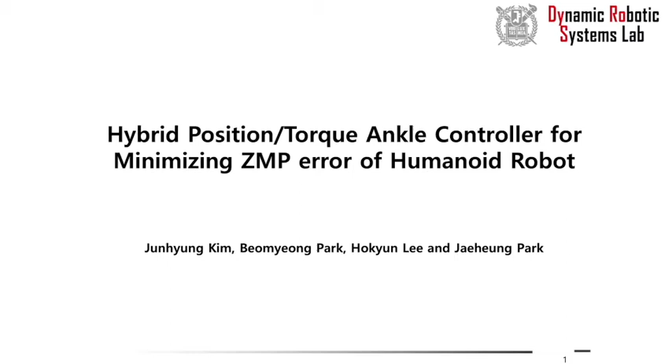I will introduce my research: hybrid position torque ankle controller for minimizing ZMP error of humanoid robot. When generating the walking pattern of the humanoid robot, the linear inverted pendulum model, called the LIPM, is widely used. The LIPM has the advantage of being able to generate an analytic walking pattern, but there is a model error with the actual robot. Due to the model error, the error between the desired ZMP and the actual ZMP occurs.

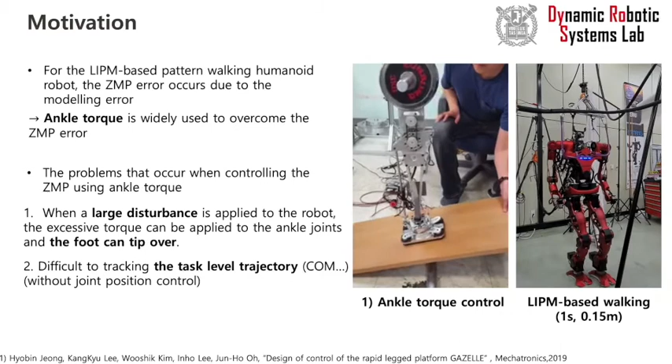To overcome the ZMP error caused by the model error, studies using ankle torque have been conducted. However, if torque control is performed without controlling the position of the ankle joint, two problems can occur. First, when a large disturbance is applied to the robot, excessive torque can be applied to the ankle joint, and the foot can tip over. Second, it is difficult to track the task level trajectory like COM.

To solve the previous two problems, the proposed hybrid ankle controller can overcome these limitations. The hybrid controller has the advantage of being able to control position and torque at the same time. The proposed hybrid ankle controller consists of a position controller and a torque controller. So when we use the hybrid ankle controller, we can control the position of the ZMP and track the COM trajectory at the same time.

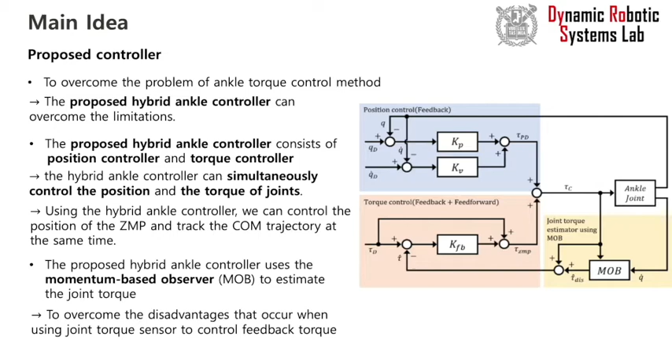Especially, the estimated torque using MOB is used for the torque feedback control loop of the proposed controller. The algorithm can be implemented without joint torque sensors and is not affected by sensor noise and bandwidth. As a related study, the first video is the previous research about ankle torque control for ZMP tracking. Although the performance of ankle torque control has been demonstrated in previous research, the limitations mentioned in the previous slide exist.

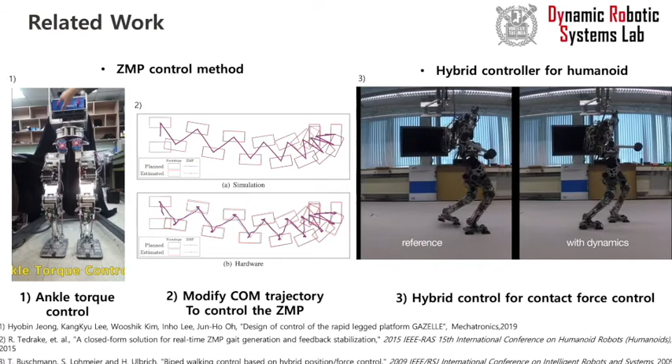Also, there are some studies to improve ZMP tracking performance by modifying the COM trajectory aside from using ankle torque control. However, the method of modifying task trajectories such as COM or capture point for ZMP tracking has slow responsiveness to sudden disturbance. Unlike this study, another example of using a hybrid controller for a humanoid is the study on the right. In that study, the hybrid controller was used to control the contact force at the task space level. From now on, we will explain the proposed hybrid ankle controller.

To track the desired joint position trajectory and desired joint torque that can minimize the ZMP error, we designed the hybrid position torque ankle controller. The joint position controlled humanoid robot has the desired joint position trajectory calculated from the IK to walk with predefined walking patterns. A PD controller is used for joint position control to track the desired joint trajectory.

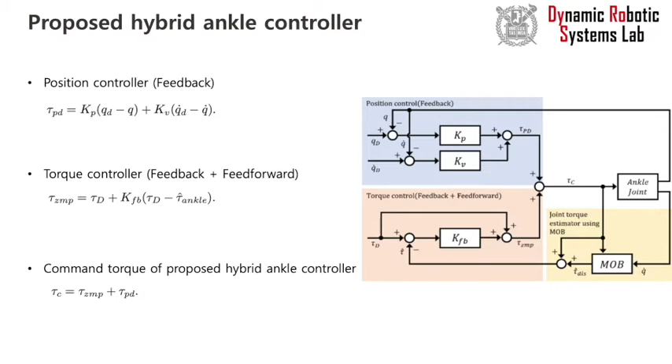The torque controller is used to minimize the ZMP error and consists of a feed-forward controller and a feedback controller. Finally, the commanding torque of the ankle joints can be calculated as the sum of the position control torque and the torque control torque. To obtain the current joint torque to be used for torque feedback control, it was estimated using MOB. By using this joint torque estimate from the model-based observer without using a sensor, our proposed algorithm can be used without a joint torque sensor and ensure control performance regardless of sensor noise and bandwidth. Also, the closed-loop internal stability of the torque controller is enhanced by using the model-based observer.

We can formulate the momentum and observer dynamics of the robot. By subtracting the observer dynamics from the momentum dynamics, we can obtain a low-pass filter form of the disturbance torque. Finally, the joint torque can be estimated by adding the commanding joint torque and the estimated joint disturbance torque.

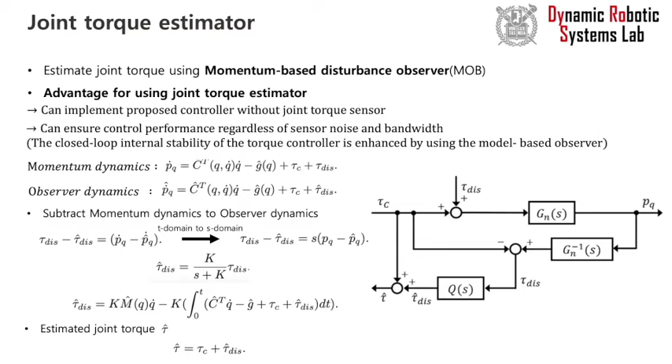The method to calculate the desired ankle joint torque for ZMP tracking is as follows. The ankle torque is calculated so that the moment applied to the desired ZMP position becomes zero through the contact force measured on both feet. From the first equation, the torque required for the ankle to make the desired ZMP can be obtained from the desired ZMP position and the force of both ankles measured from the force sensor.

The ankle torque distribution ratio required to distribute the ankle torque is obtained as in the third equation. In the double support phase, the ankle torque distribution ratio is determined depending on the distance between the position of the ZMP and both feet.

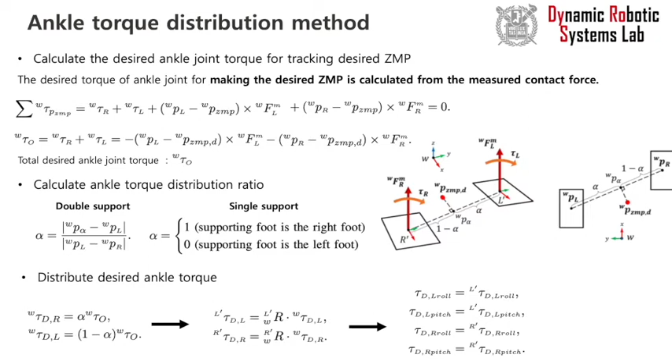Also, in the single support phase, the ankle torque distribution ratio is determined so that the desired ankle torque can be applied from the supporting foot. Finally, considering ankle orientation, both ankle torques are determined using a distribution ratio respectively.

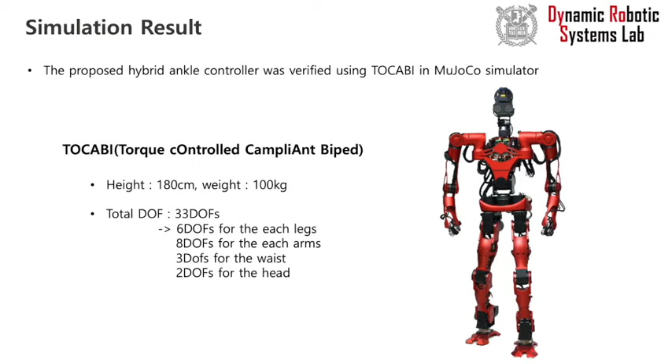The performance of the proposed controller was verified using Tocabi in the simulator. Tocabi has 6 DOFs for each leg, 8 DOFs for each arm, 3 DOFs for the waist, and 2 DOFs for the head. Tocabi has a height of 180 cm and a weight of 100 kg.

In the simulation, the humanoid Tocabi walks a total of 1 meter with a stride of 10 cm, and the walking time of one step is 1 second. The real ZMP was measured using the force torque sensor attached to the foot. When the proposed hybrid ankle controller is not used, the measured ZMP on the x-axis increases sharply owing to the motion of the swing foot during the swing phase.

In addition, during the landing phase, the measured ZMP on the x-axis decreases sharply owing to the impact force generated when the swing foot lands. In contrast, when the proposed hybrid ankle controller was used, the error of the ZMP in the x-axis direction was reduced by approximately

54.8%. Furthermore, after using the proposed hybrid ankle controller, the error of the ZMP in the y-axis was reduced by approximately 23.4%. When the proposed hybrid ankle controller is not used, the measured ZMP in the y-axis moves out of the

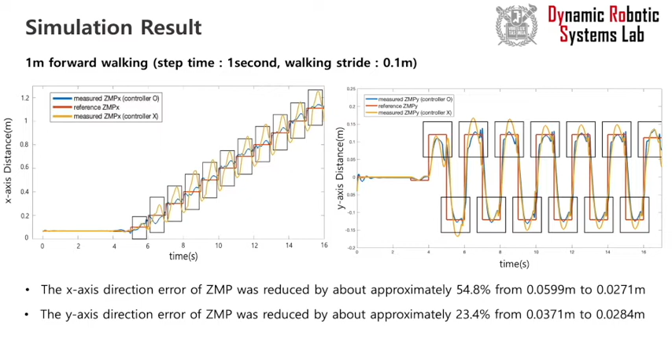support polygon area. However, when the proposed hybrid ankle controller is used, the measured ZMP in the y-axis converges to the desired ZMP reference and exists in the support polygon area.

To verify whether the proposed hybrid ankle controller can maintain stability by reacting immediately to the external force, in the simulation the humanoid Tocabi walks a total of 0.5 meter with a stride of 10 cm and the walking time of one step is 1 second. A 200 Newton x-axis external force was applied to the torso of Tocabi for 0.3 seconds at 6.1 seconds when the swing foot lands.

When the proposed hybrid ankle controller was not used, the humanoid failed to maintain stability against an external force. However, when using the proposed hybrid ankle controller, Tocabi was able to maintain stability by applying the ankle torque to minimize the ZMP error due to the external force.

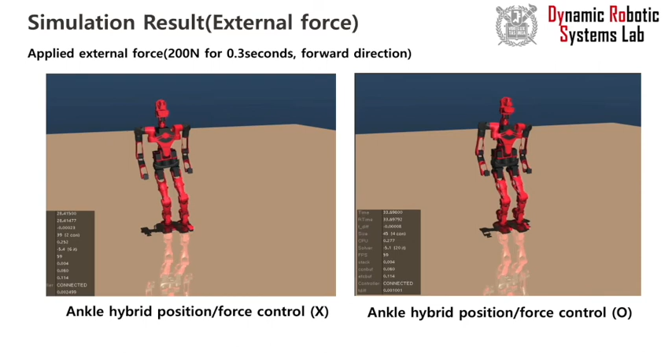When the proposed controller is not used, the ZMP comes out of the supporting foot due to the external force. In contrast, when the proposed controller was used, it was confirmed that the ZMP was controlled and did not go out of the supporting foot even against the external force. The high torque feedback gain allows humanoids to maintain stability even under an external force of 200 Newton.

When a stronger external force is applied, a higher gain of the torque controller is required for the humanoid to maintain balance. The simulation results show that the humanoid robot with the proposed method can maintain its stability when an external force up to 200 Newton is applied to the robot.

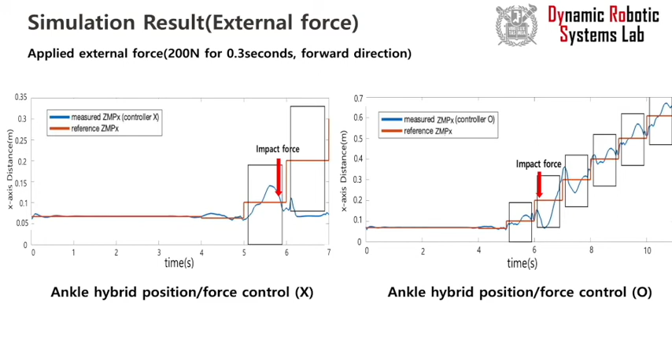Finally, in this study, the hybrid position torque ankle controller was proposed to minimize the error of the ZMP. The hybrid controller is used to track the desired joint position calculated from the IK and apply the desired joint torque to minimize the ZMP error simultaneously. For torque feedback control, the torque of the ankle joint was estimated using MOB. As a result, the proposed hybrid ankle controller can be used without a joint torque sensor.

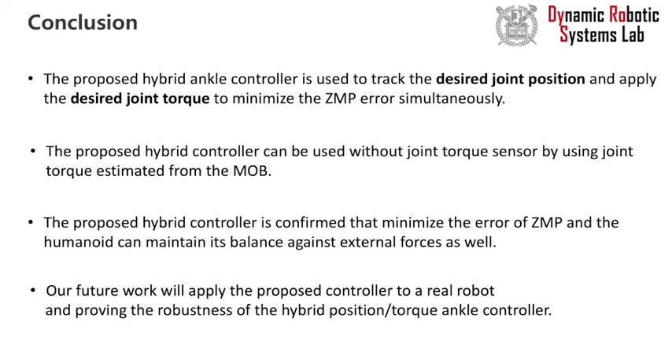Through the simulation, it was confirmed that the ZMP tracking performance was improved when the proposed controller was used. In addition, with the proposed hybrid ankle controller, we confirmed that the humanoid can maintain its balance against external force as well. Our future work will involve conducting experiments by applying the proposed controller to a real robot and proving the robustness of the hybrid position torque ankle controller.